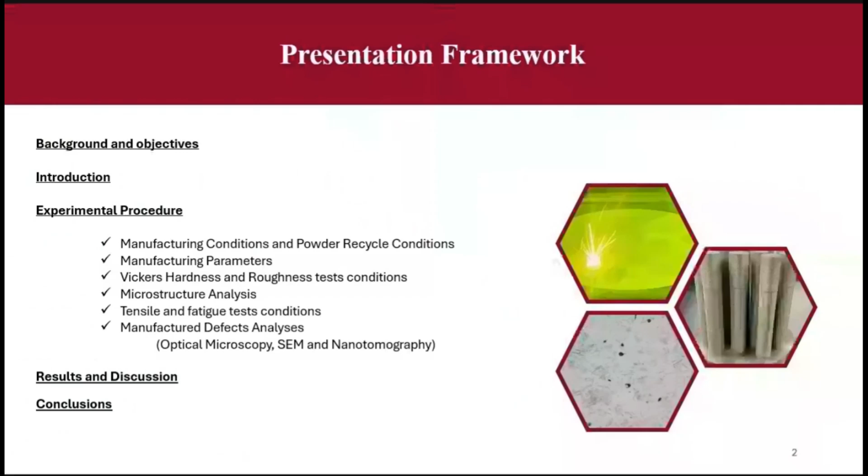Traditional and additive processes produce intrinsic manufacturing defects. We can optimize the parameters as best we can to have few defects, but we have defects, and we have to know that the components will have intrinsic manufacturing defects. These defects influence the structural integrity of mechanical components. So the discussion is: what is the percentage of intrinsic manufacturing defects to consider bad, good, or excellent quality?

Of course, we know this from traditional manufacturing. From each kind of industry, we have established the quality control for these defects. But for additive manufacturing defects, I didn't find anything. So, how does the percentage of intrinsic defects influence the fatigue behavior? We know that they exist, and we have to understand how these influence the fatigue behavior.

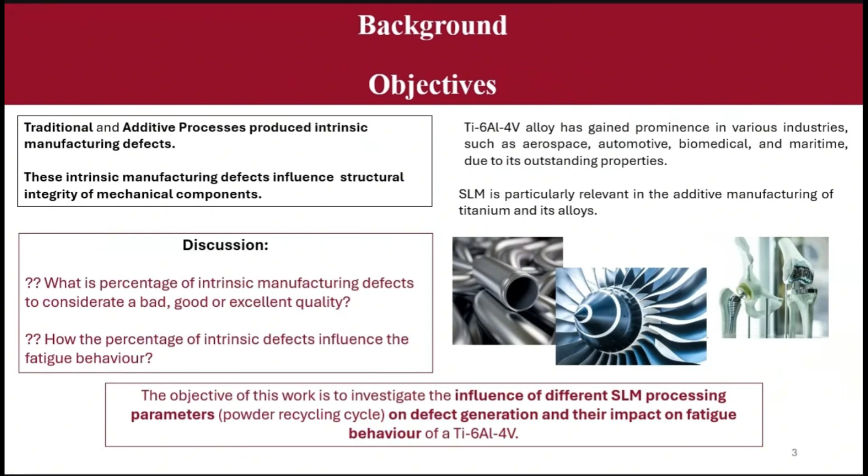So the objective of this work is to investigate the influence of different selective laser melting processing parameters, and I will focus on the powder recycle cycles, on defect generation and their impact on fatigue behavior. The material that I study here is titanium 6 aluminum 4 vanadium.

As we know, in this process, a high intensity laser melts thin layers of metal powder, creating a part layer by layer. The advantage of this technology is near net shape production. That means, since we are always talking about sustainability, manufacturing sustainability.

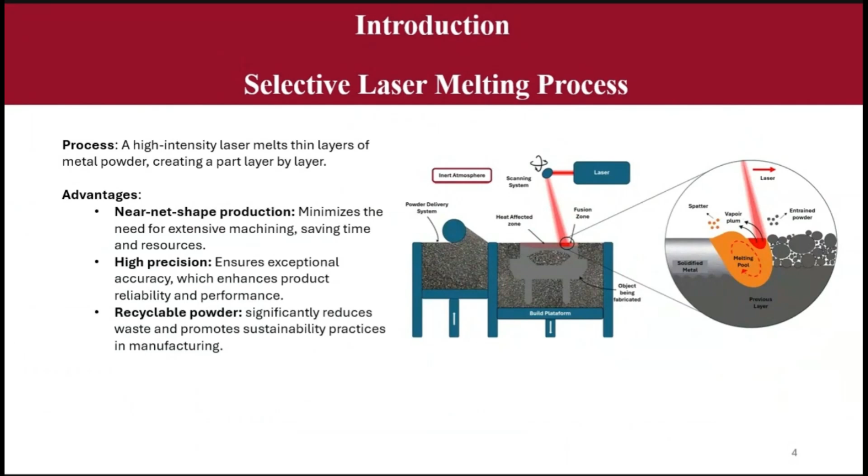So these are the advantages: minimize the need for extensive machining, saving time and resources. High precision ensures exceptional accuracy with enhanced product reliability and performance, and recycled powder significantly reduces waste and promotes sustainability practices in manufacturing.

So the limitations: restricted material choice, some alloys are difficult to process due to cracking and oxidation. Powders must have a specific particle size, shape, and flowability. Recycled powders can degrade quality.

Another kind of limitation is that high thermal gradients during rapid melting and solidification cause cracking, thermal distortion, shrinkage, and powder spreading imperfections. Then we have another problem when manufacturing: fine powder trapped in internal channels is difficult to extract. The powders are expensive, and machines require an inert atmosphere.

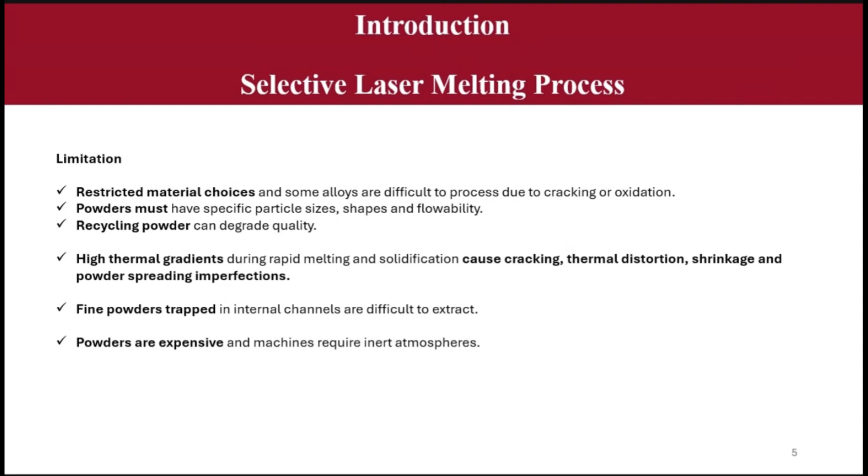Of course, there are more limitations and more advantages, but these are the principles that I want to focus on here.

Defects create stress concentration zones, which can lead to fatigue crack initiation, so we have to study these defects. Despite strict process control, common defects include porosity, surface roughness, cracks - hot or cold crack - and residual stress.

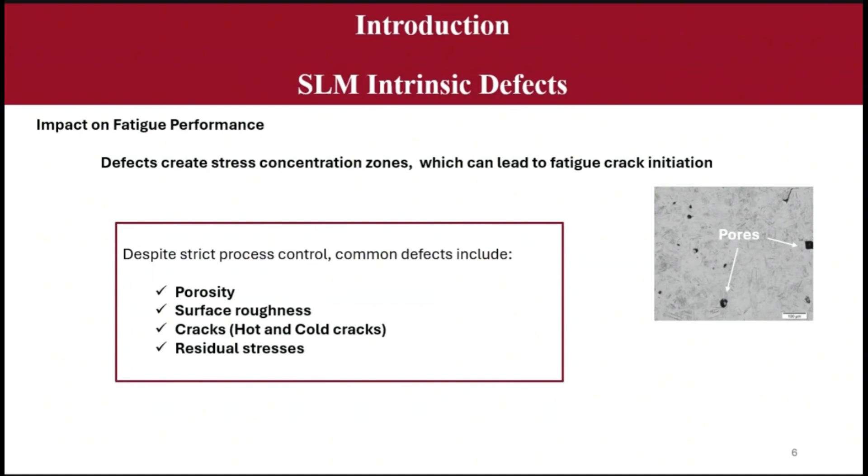And of course, we already know how to try to control the SLM parameters to mitigate SLM manufacturing defects. For gas porosity, we can maintain an inert and controlled atmosphere, use high quality, low oxygen, pre-processed powder. For keyhole porosity, we can optimize the laser power, and for lack of fusion porosity, the laser energy must be sufficient and the scanning of the layers must be optimized.

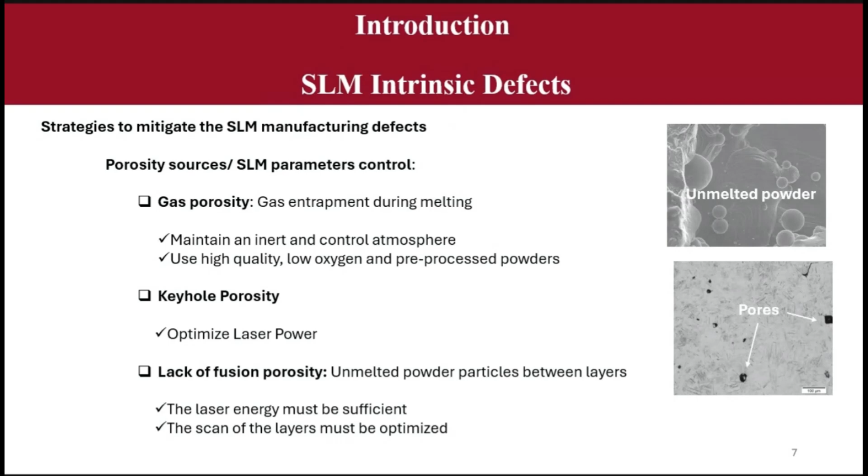And you say, okay, we have this, but we don't have a recipe to make it. So it's empirical, you have to understand, you have to try it, we have to optimize these parameters. You don't have a recipe.

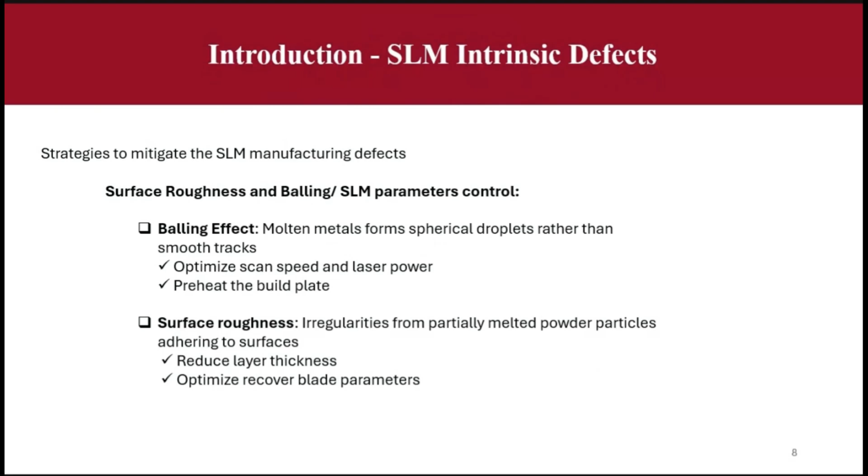The surface roughness and balling. To mitigate this kind of manufacturing defect, for balling effects we can optimize the scan speed and laser power and pre-heat the build plate. For surface roughness, we can reduce the layer thickness and optimize the recoater blade parameters. For hot cracks, you must pre-heat the substrate, select materials with good weldability and lower solidification shrinkage. For cold cracks, you can optimize the scan strategies and implement stress relief heat treatment after printing.

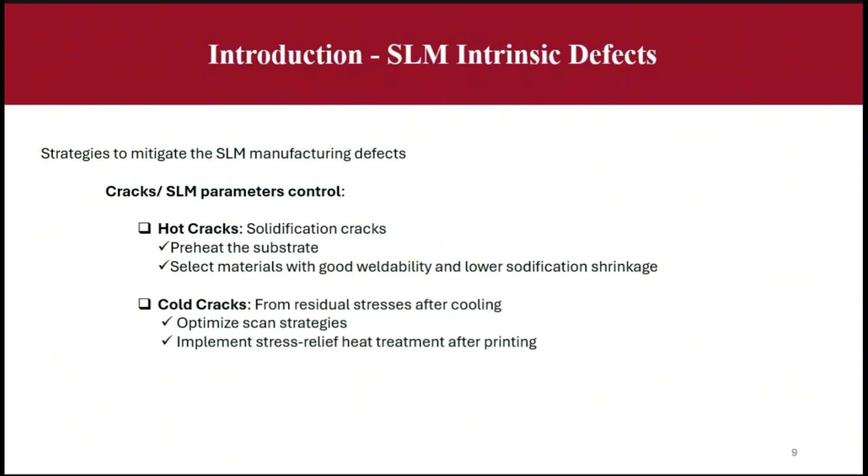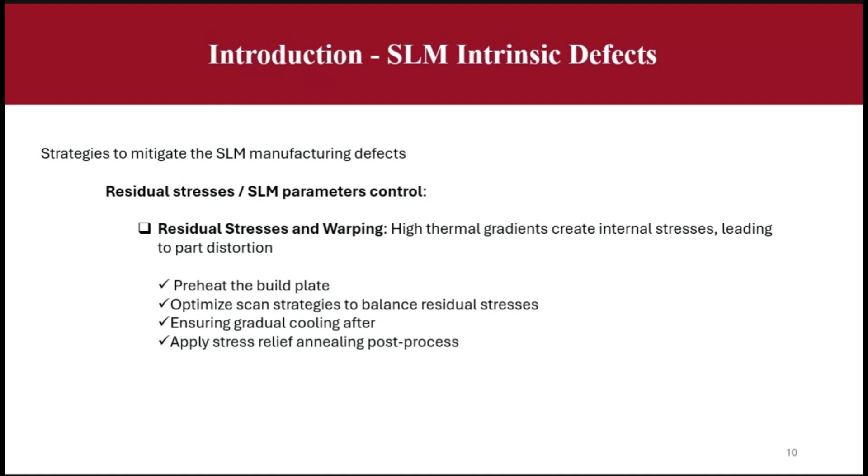So notice, you can manufacture very complex shapes, and for each shape you have a kind of recipe to make your components. For residual stress, you can prevent that by pre-heating the build plate, optimizing scan strategies to balance residual stress, ensuring gradual cooling after manufacturing, and applying stress relief and annealing post-process.

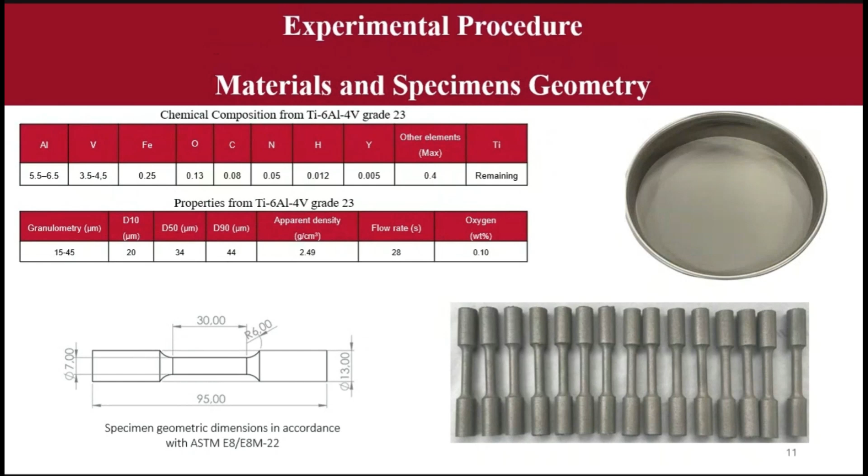So I will move to the example that we made for this presentation. We chose titanium 6 aluminum 4 vanadium grade 23, and the properties of the powders are in the second table. We produced some specimens using the ASTM E8 geometric dimensions. There is the recipient for the powders, but they are gray, and the recipient is gray, so we can see nothing. We produced these specimens with the printer equipment, and we produced 3 batches.

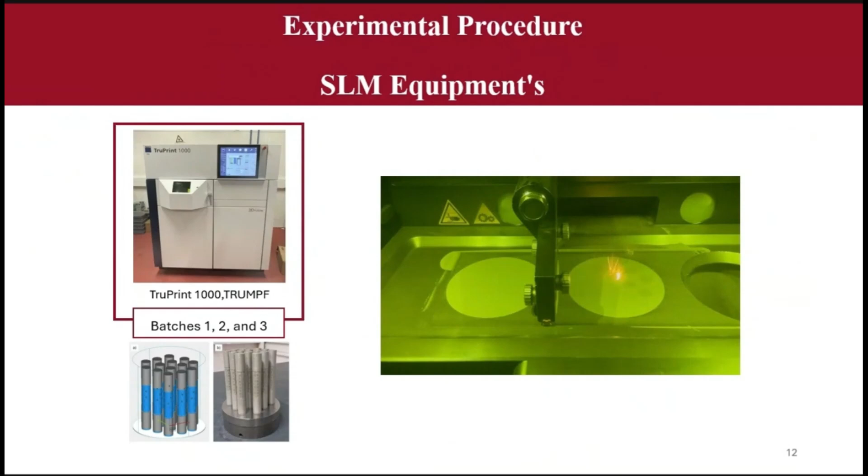Here is the film where we can see the scan of powders and the laser building the layers. The position for these layers is very important. Sometimes we have to put some degree of inclination to have a different flux, but for this we made it in vertical.

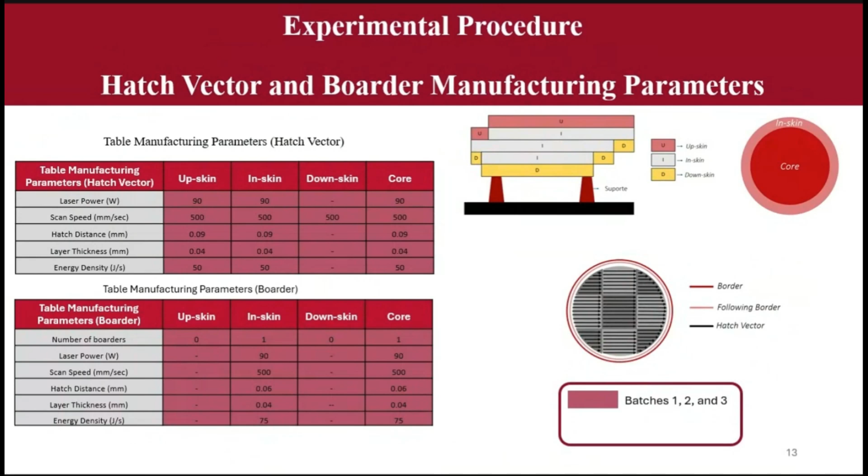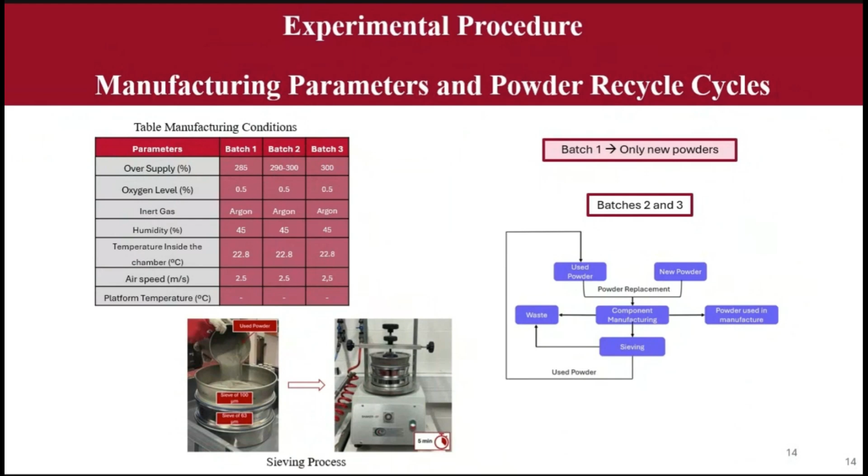All the parameters were kept the same because it's too many parameters to vary together.

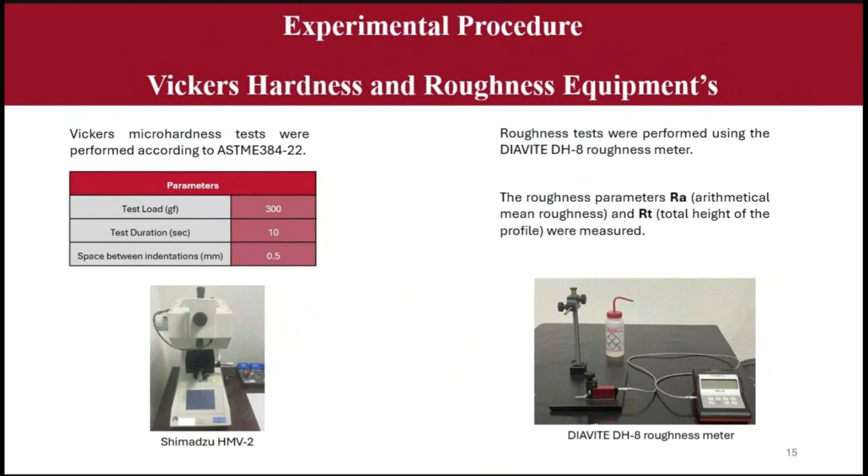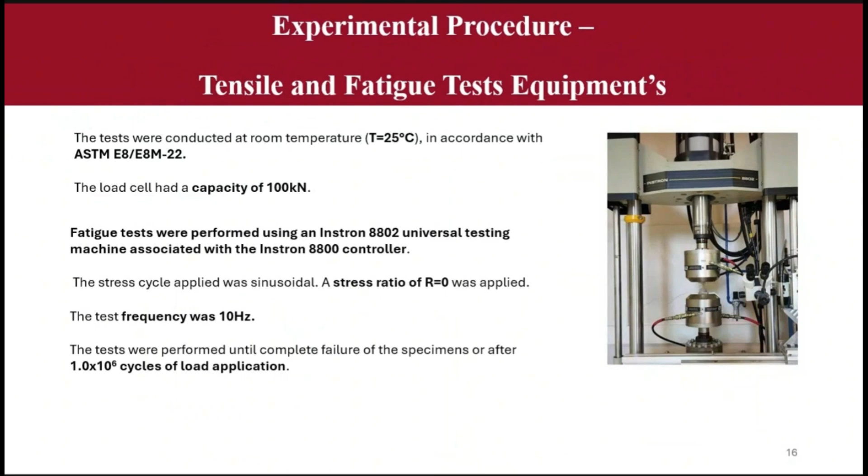The tests were performed until complete failure of the specimens or after 1 million cycles of load application. For the manufacturing defects study, we used the optical microscope and the scanning electron microscope shown in the figures.

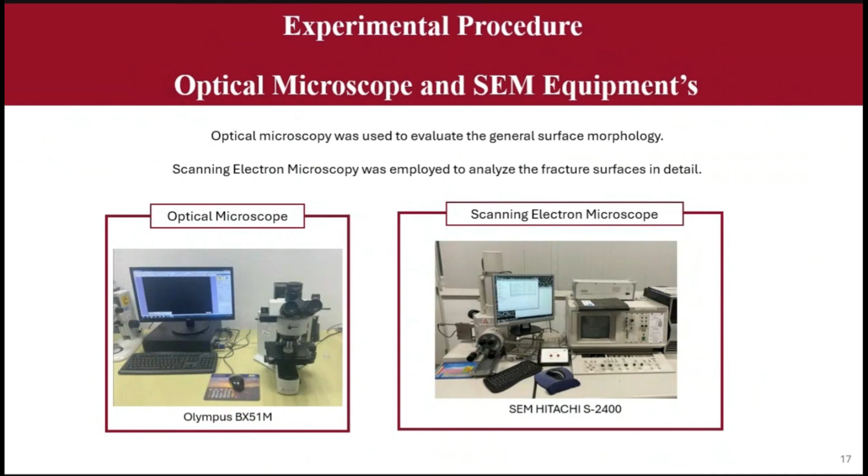The CTvox visualization program allows simultaneous viewing and tracing of the entire set of slices, enabling capture of the external and internal image of the object.

Then, using the CTAN analysis software, the images were segmented and binarized to separate all identifiable pores and eliminate some artifacts.

Although many pores are visible in the outermost region of the specimens, the most relevant quantitative analysis is focused on a more restricted inner volume defined based on the size of the initial samples.

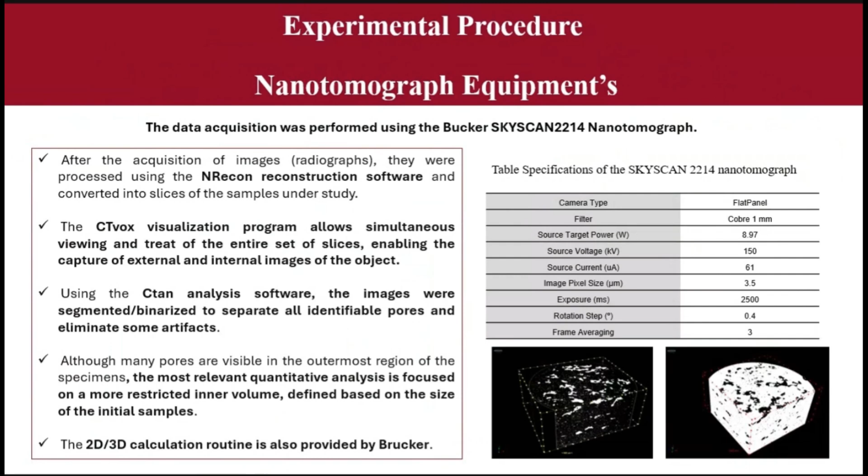The 2D and 3D calculation routine was also provided by Bruker. In the table, we present the specifications of the nanotomograph equipment.

Now we go to the results and discussion. In this table, we measured the Vickers micro hardness and obtained about 500 HV 0.3, which is higher than values reported in the literature. The high hardness of the as-built samples is attributed to the martensite alpha prime acicular structure observed in the microstructure.

For the surface roughness, we found an increase of Ra and Rt with recycled powders. As stated below the table, as the proportion of recycled powder increases, the surface becomes rougher and less uniform, with higher Ra variability and a clear rise in Rt values.

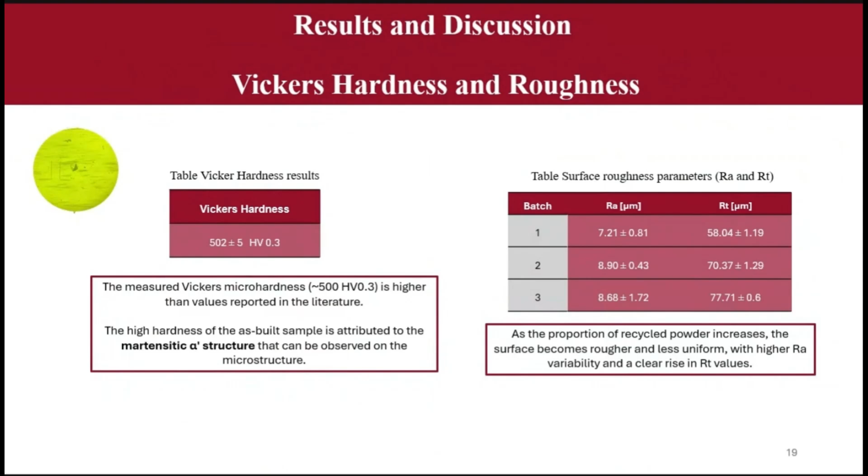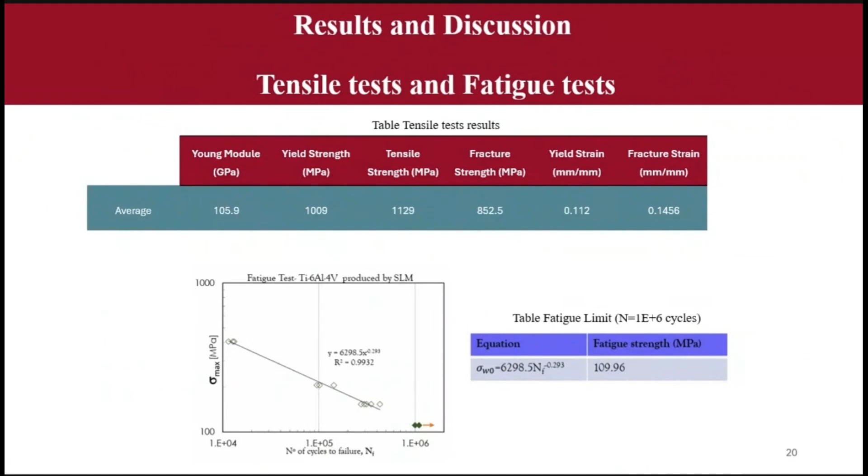Here we present the tensile test results and fatigue limit for a number of cycles. The criteria was one million cycles, as I said, and you can notice that the fatigue limit was about 110 megapascals.

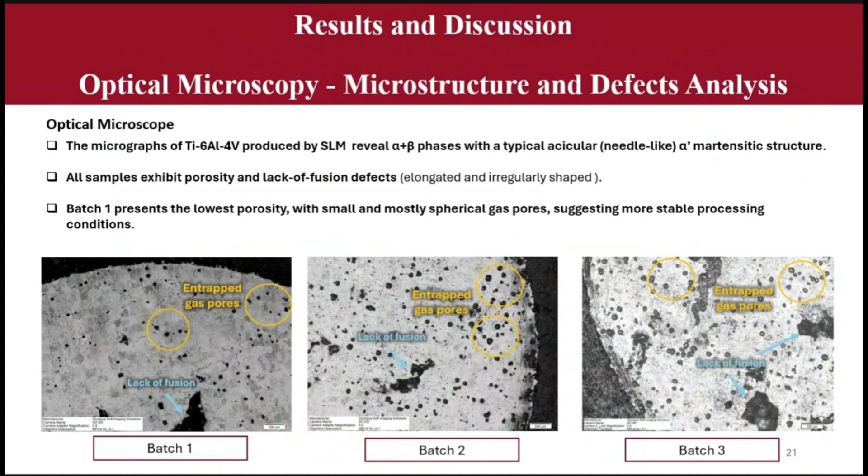Here we have the optical observation. As we can see, though the micrograph isn't very clear here, the microstructure of this titanium alloy produced by selective laser melting reveals alpha and beta phases with a typical acicular alpha prime martensite structure. All samples exhibit porosities and lack-of-fusion defects, and batch 1 presents the lowest porosity. Recall that batch 1 used only new powders, with small and mostly spherical gas pores, suggesting more stable processing conditions.

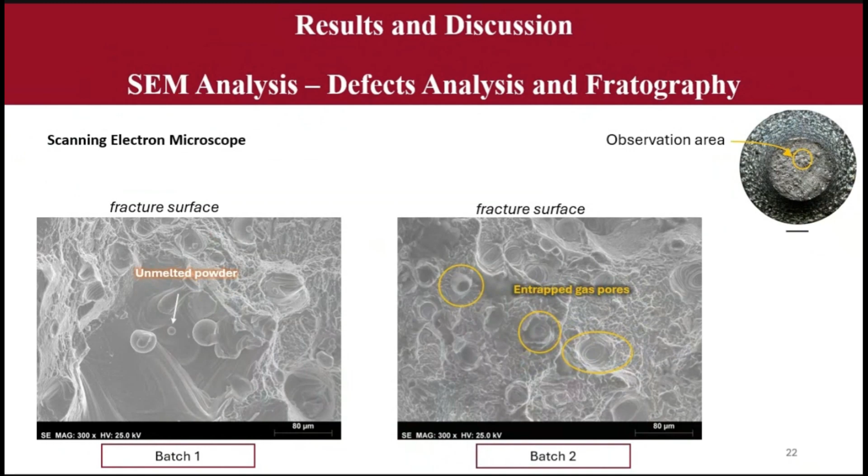In batch 1, with virgin powder, we see the lowest porosity. Batch 2, with 23% twice-sieved powder, shows fewer defects than batch 3 but more than batch 1. Batch 3, with 24% three-times-sieved powder, exhibits the highest defect content.

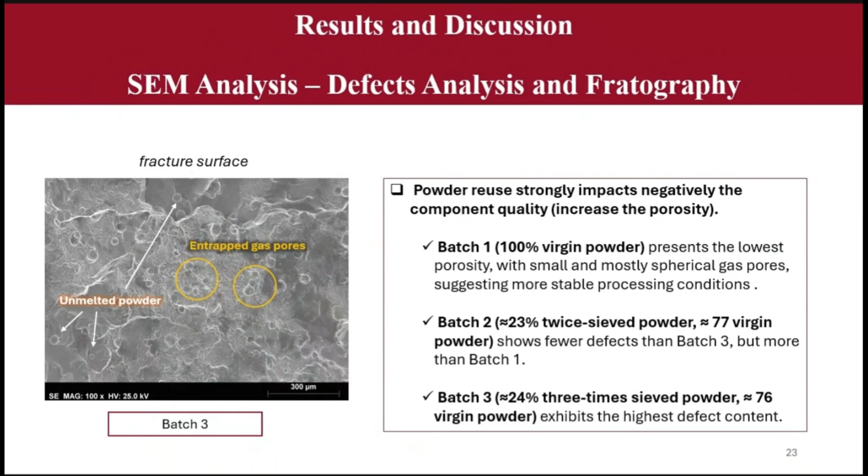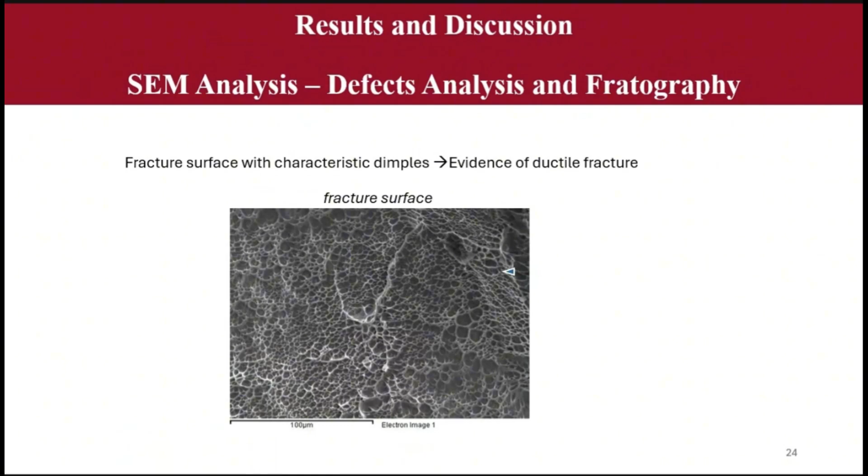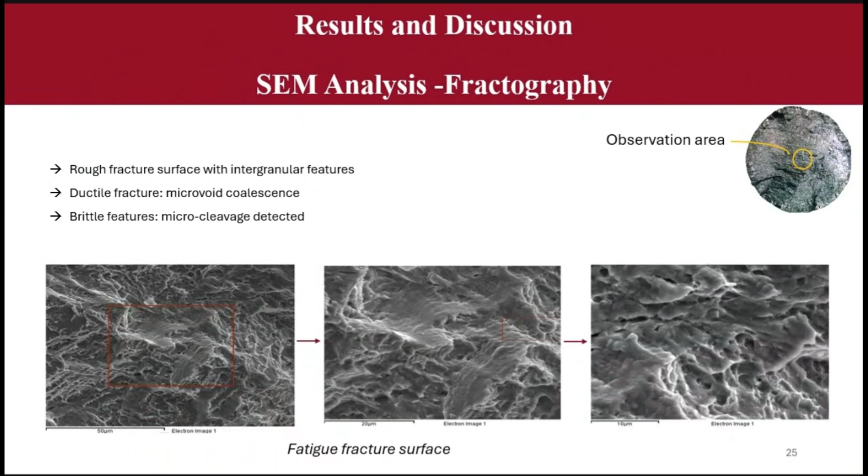From the 3D defect study, many manufacturing defects were observed in batch 2 and batch 3. Knowing the sample volume, the defect volume, and the corresponding defect percentage is essential for quality control.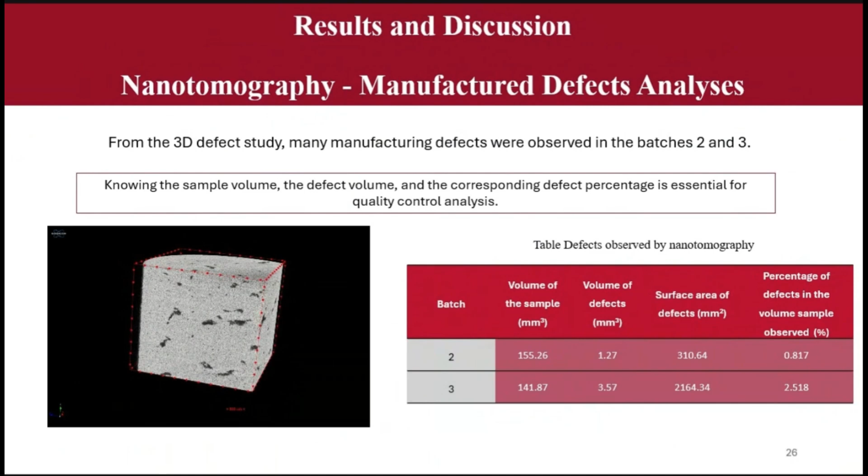In the tomography image with full treatment applied, we can see many pores and defects. But looking at the last column of this table, the percentage of defects in the sample volume is less than 1% for batch 2, and about 2.5% for batch 3. This is the important part.

As a conclusion, optical microscopy, scanning electron microscopy, and nanotomography must all be used together to characterize the material and reveal defects in all batches, including gas porosity, lack of fusion, and unmelted powders. Nevertheless, all batches maintain a relatively low defect volume fraction, and this is important.

Surface roughness increased with the proportion of recycled powders, as many authors have also concluded. The corresponding defect percentage in volume is essential for reliable analysis and for establishing quality control of the manufacturing process.

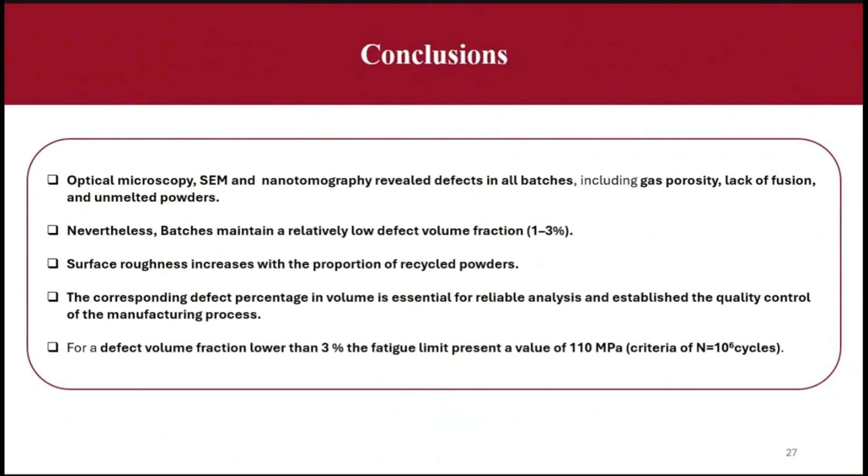For a defect volume fraction lower than 3%, the fatigue limit presents a value of 110 megapascals for this criterion. What I've observed reading some papers is that authors often forget to state the failure criteria or how many defects the material had. This is important because the values can be very different.